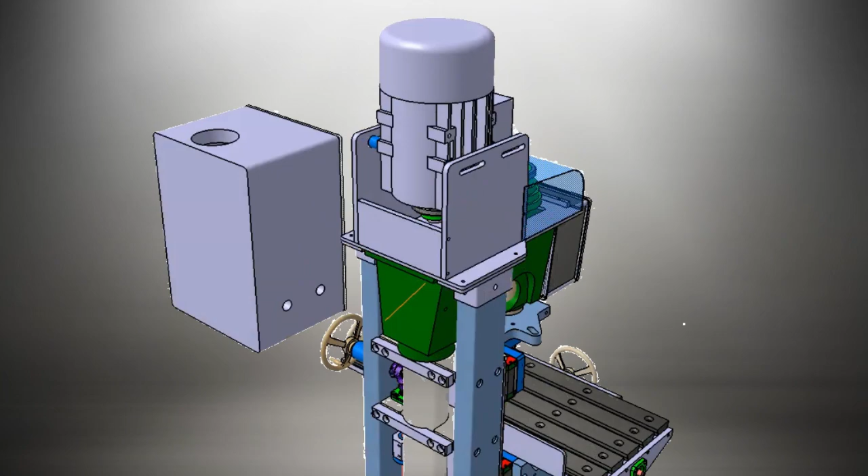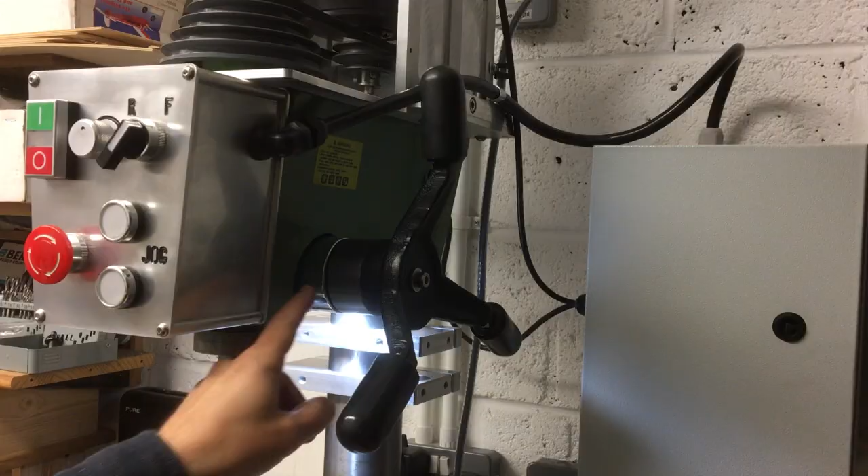While you've been away, I managed to spray this adapter collar that I made between the handle and the quill, just to move the handle away and give me clearance at the top there. It's this Rust-Oleum gunmetal grey, a slightly metallic finish. I used it on my CNC machine on some of the box sections, and I really like the colour and the finish that it gives, so I've done that. That should keep the rust at bay.

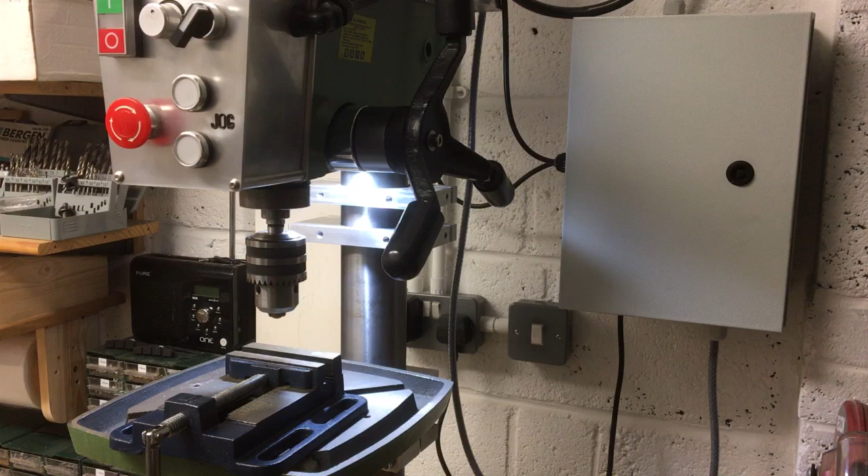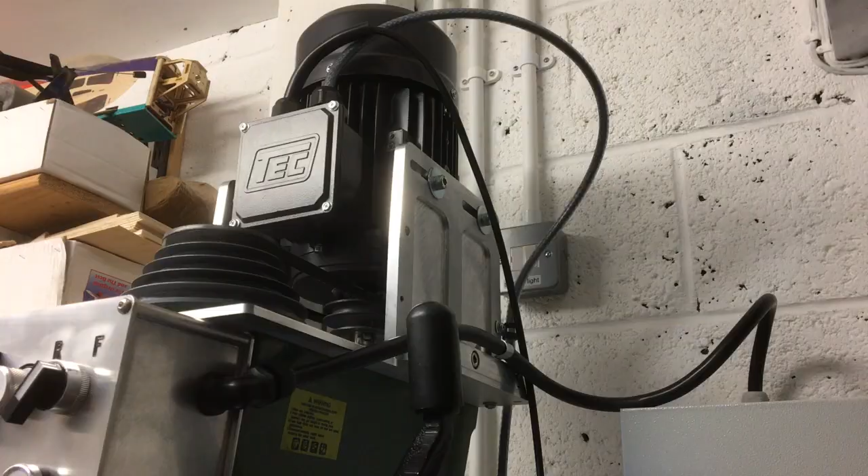In the last episode we also got the table mounted, which does mean we can start to drill some holes in some of the later components. The thing is, before we get too carried away with that, we need to have a look at the motor cooling. In an earlier episode you probably saw me install that 3-phase motor.

In the UK that would run at 50 Hz nominal, in other markets might be 60 Hz. On the end of the rotor shaft that goes all the way through the motor, at the top there's a fan. It's a white plastic fan, unidirectional fan, and that's enough to keep the motor cool at that nominal speed, 50 or 60 Hz.

One of the advantages of running it from the inverter with variable speed control is we can run it at a range of speeds. The downside is, because of that fixed fan, when we go to lower speeds, there's an exponential, or probably even a cubic, drop off of the airflow, and there isn't really enough airflow at the lower speeds, and you can burn these out. I know I've got the over temperature sensor in here, but I don't really want to risk it, and the supplier highly recommends you add an additional fan when running it below 50 Hz.

So before we make up the mounting for the auxiliary fan, we just need to see which way it wants to draw the air. You might be able to see that white fan down there. It's a straight bladed fan with a scoop at the bottom, basically a unidirectional fan, so whether it's going forward or reverse, it'll always pull the air in the same direction.

So we've just got a bit of tape here. We'll just see which way that is, and then we can mount our auxiliary fan to make sure it's helping and not hindering. We've got it in forward, so we'll run it forward and see which way it pulls the air. Starting now.

So the fan was going forwards, and it was clearly pulling the air down. Now I'll put it into reverse. Try it again. Now it's going the other way, and it's also pulling the air in. So whichever way it goes, it always draws air in and over the motor.

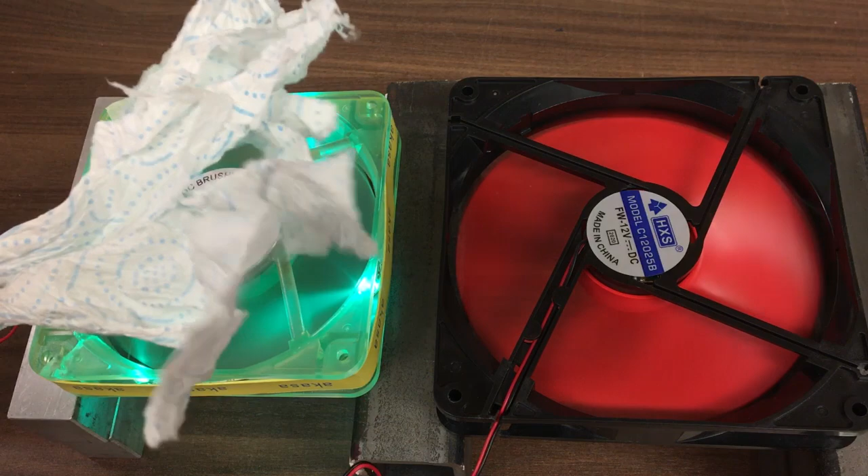Well, actually, as you can see, that's chopping it up. It's doing pretty well compared to - this is really scientific, I know. So we've got that versus... Yeah, so the smaller fan is actually kicking out a lot more air.

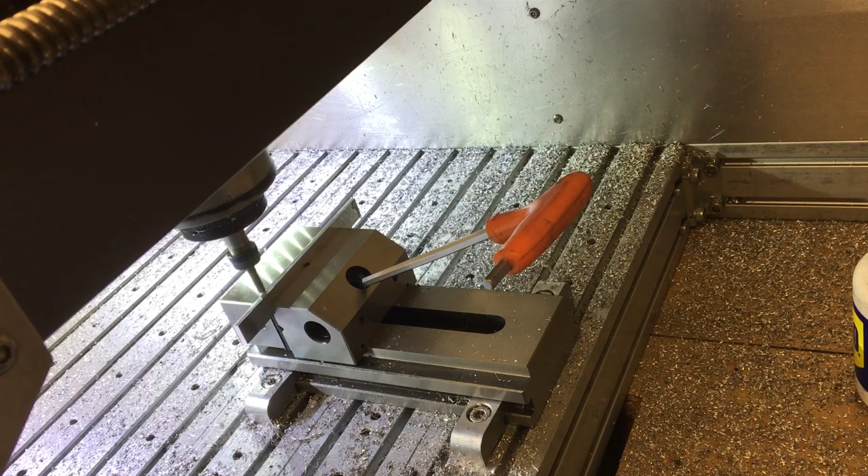I made up these two side brackets just out of a bit of 3mm scrap aluminium. So I'm using the CNC machine in manual mode just to get to the final dimensions.

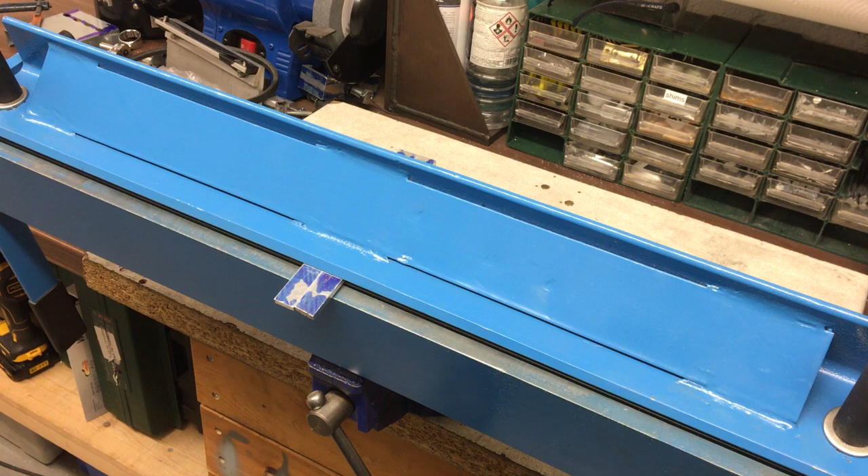So we've got the two pieces ready to bend. They're oversized at the moment, so you can see they're just rough cut. Then when it's bent, we can work out and measure the final length and then drill the hole in the right location. I'll just put a shim in the back just to protect it as we start, so it doesn't mark the work so much. Here we go.

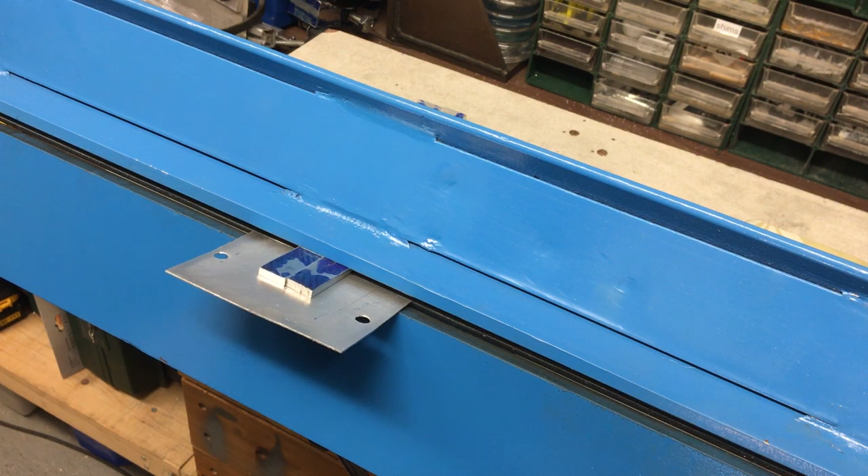And here I'm using the height gauge just to mark out the centres of the hole.

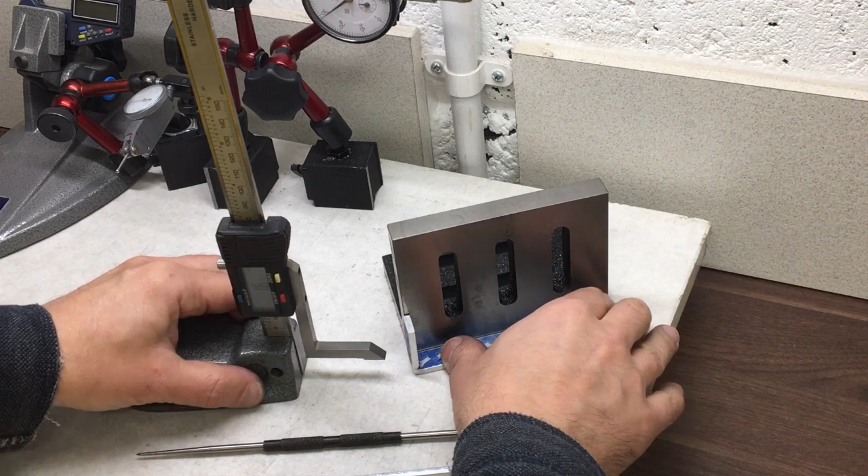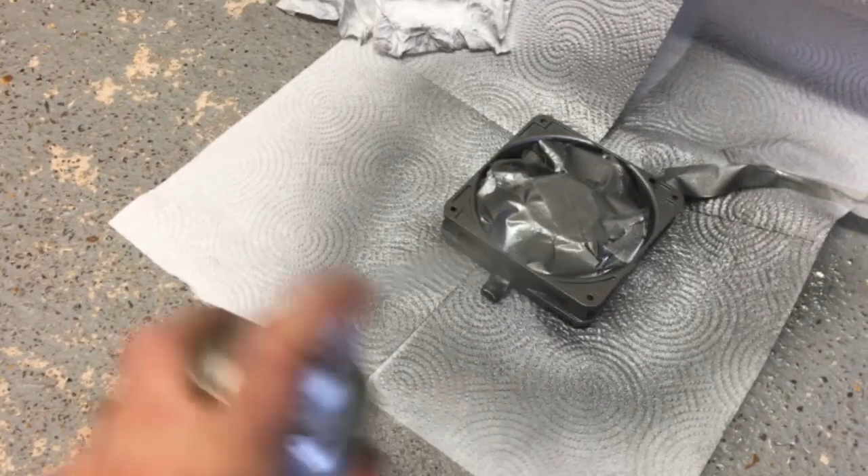Okay, so after a little bit of spray paint, that fan looks like this, so it's got a nice finish on there. And then I've also added this little 2-pin connector to the side to make it a little bit easier to fit. So that fan goes on there, kind of diagonally like that.

Like that, there. And then those two brackets I bent up look like this. They've been spray painted as well. So they're kind of going to hook in. I've got this little 4mm bolt in there, and they'll just locate like that. And then the other end just picks up on there, and they kind of sort of pull down. There's sort of two hooks like that, just hold that in place. I've also got a grill on order that I'll clip in when that arrives, and that should work really well.

Right, let's get it mounted.

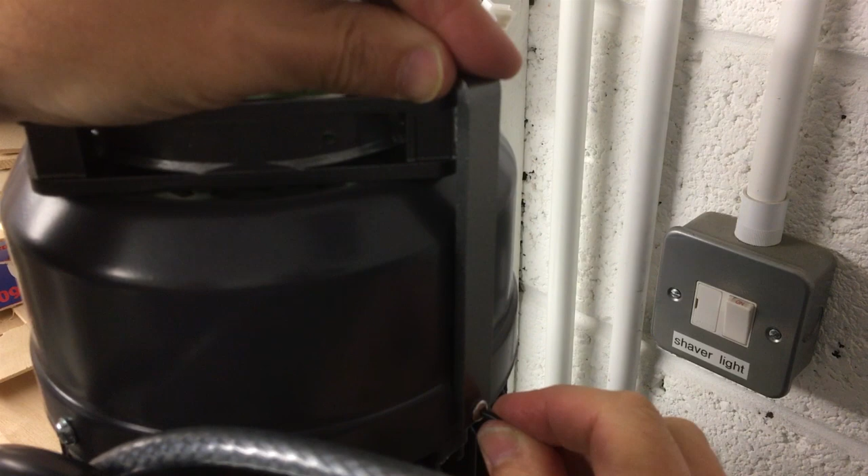Okay, one side, we'll do the other. And the last thing to do is just hook up this connector for the power.

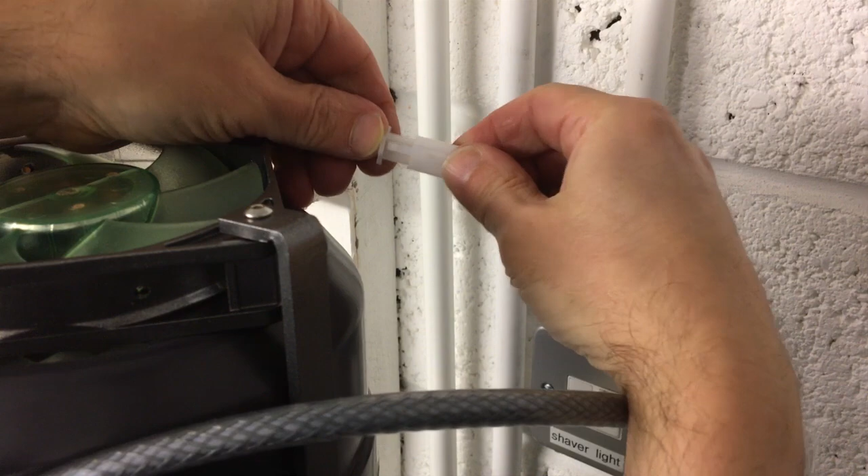So this is the cable that we just connected up to the fan up there. All I need to do is clip it into this little bracket that I made up, and then that'll be the wiring done.

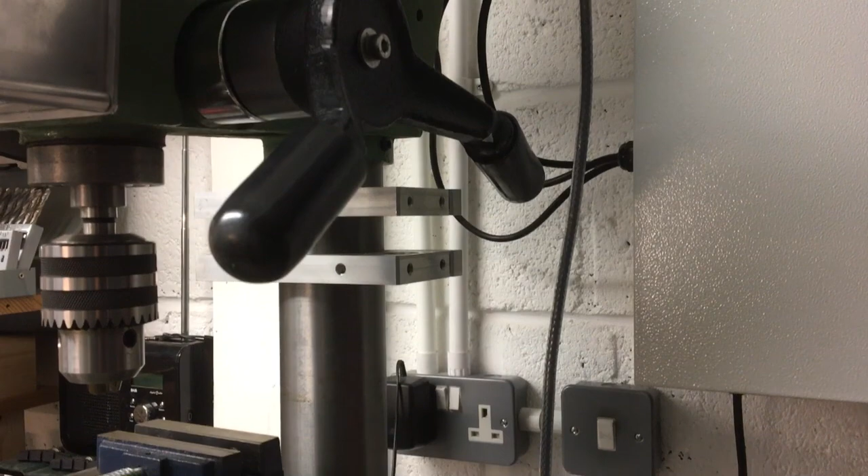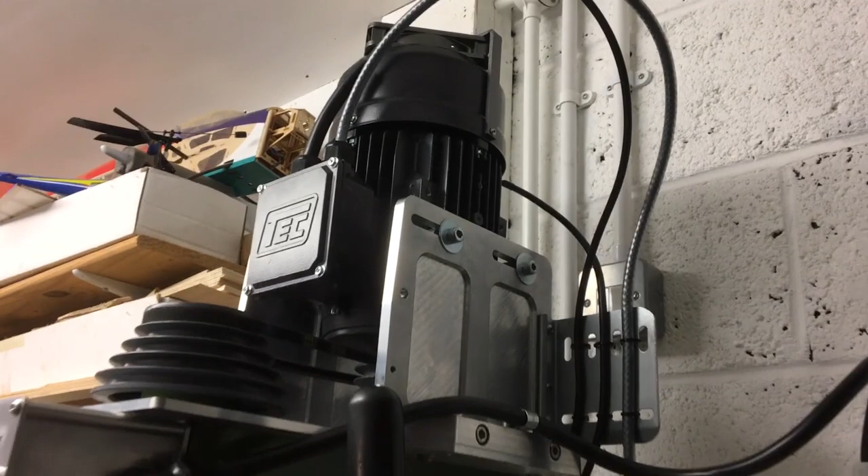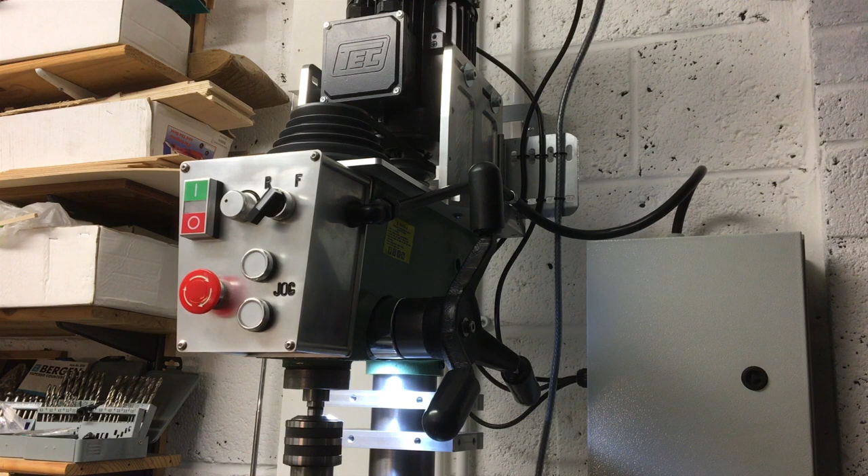Alright, let's switch it on and see if it works. I think I can hear the fan running, it's pretty quiet. Brilliant, another job done.

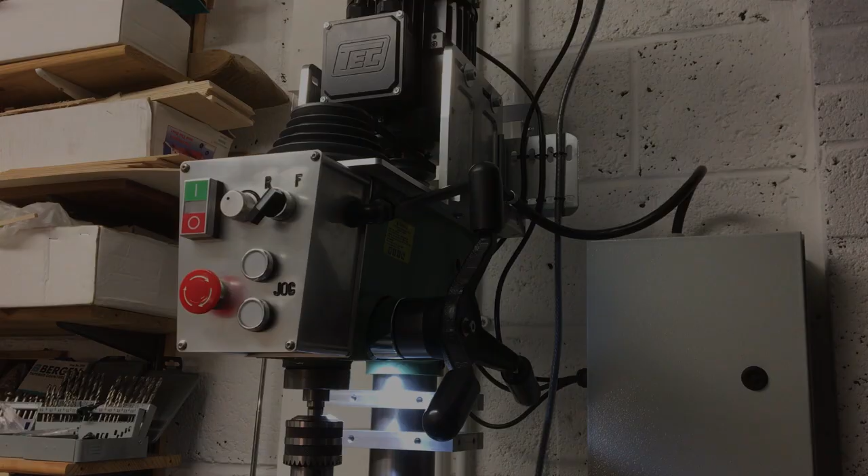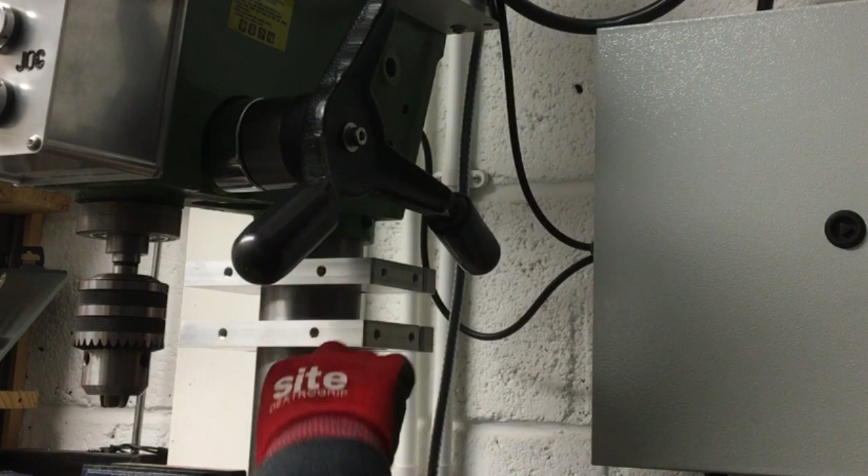Okay, let's have a look at the box sections that run down either side of the machine here. So they perform a number of functions. One is they provide some stiffness between here and the main column to stiffen the head. But also, because they run all the way top to bottom, they also stiffen the column itself. And thirdly, they provide a surface at the front here that we put the main plate on, and then the rails mount to that. So three functions in one.

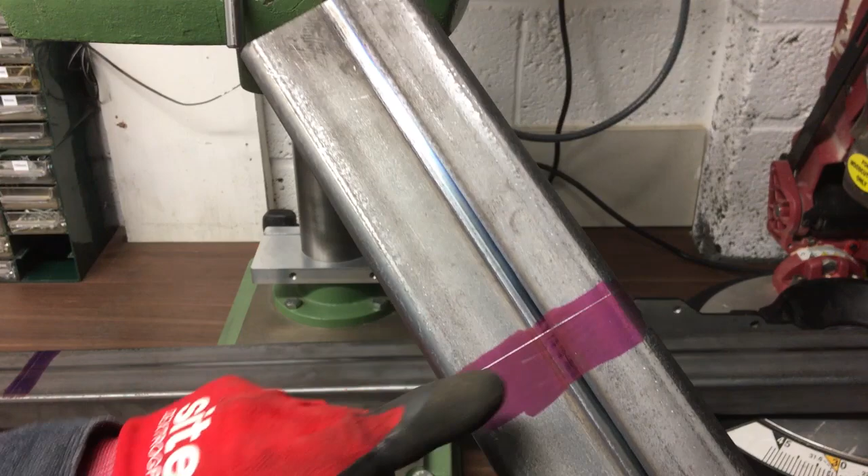So I've just measured up the actual gap here rather than relying on CAD, just the actual gap we got. I've got the box sections down here, and I've already cut the ends of them square on the chop saw, and then I've just marked up the complete length there, so we need to chop this end off, and then we'll make sure they fit in there, and then we can go over to the CNC machine and start spot marking out some of the features on here, and then we can finish off on the drill press with some of the bigger holes. Right, so let's get these chopped to length.

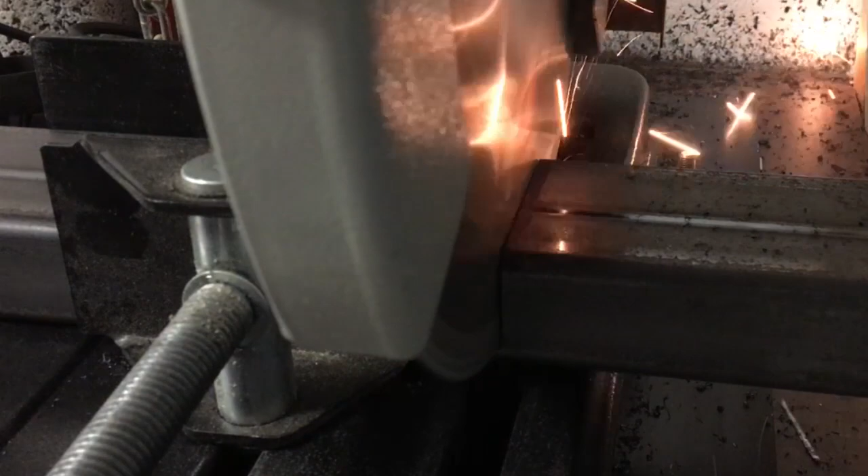Right, so we'll just offer it up into position and make sure it's going to fit. So it'll sit a few millimetres off the base there, just to give me some clearance.

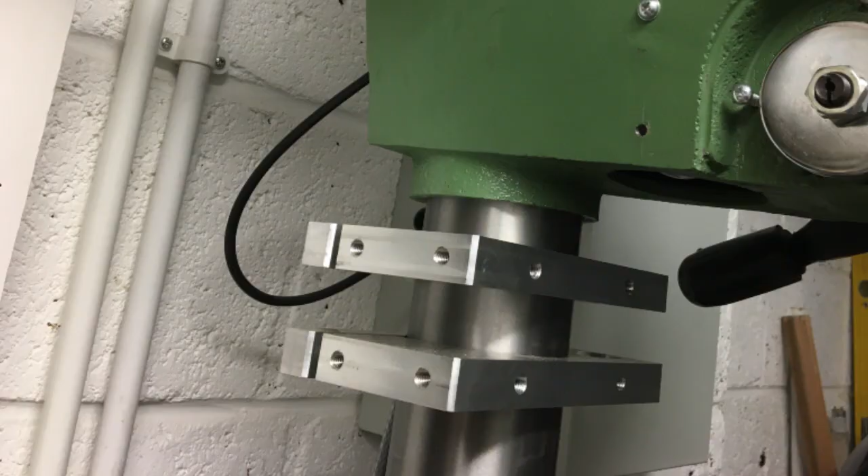And then there'll be two fixings that go into the side of this plate through here, and they'll pick up on that face there. And they'll bolt in the same way, so there'll be a clearance hole through here, and it'll pick up on that back face, just go into the two M8 holes we got in there, onto this piece, and they'll be flush with this face as well.

And then at the top here there's a kind of bracket arrangement that'll be welded on here with some slots in it just to pick up some threaded holes on here, so that will join this bit to the top plate, tying the whole machine together. So we'll tie the head to the column, and then also on this front face here, this is where this 6mm front plate will go on for the rails, and then there'll be another one on the other side obviously.

Yeah, so it looks okay. I just left myself a tiny gap there just in case. Yeah, I didn't want it to be a snug fit, so that's fine. So it's going to work nicely.

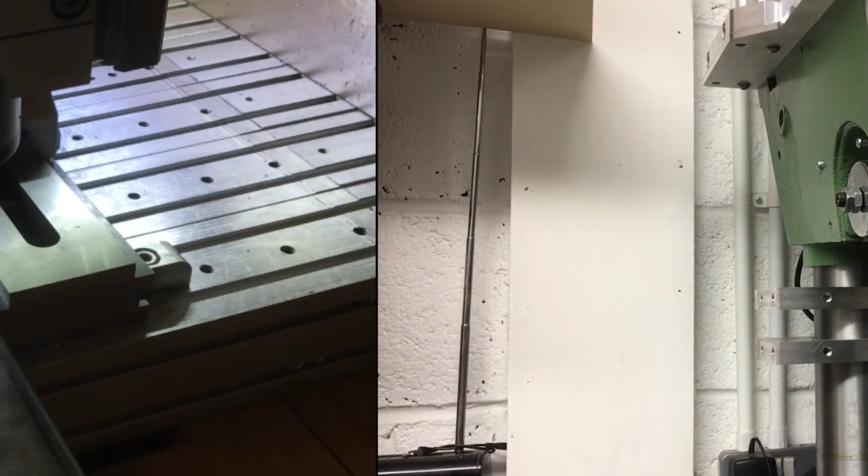So I've got the section clamped down into the CNC machine, and then I'm just using the spot drill just to mark out all the centres of the holes.

So this is the cutout that allows the height adjust for the table to go in. There'll be a sub-assembly mechanism that goes in there that will contain the drive unit and the two gears that link it to the ball screw.

And then finally the finish pass on the cutout.

And that's got us to this stage where we've got the holes spotted and marked out on both sides, and then we've got this hole cut out here for the height adjustment mechanism to go into.

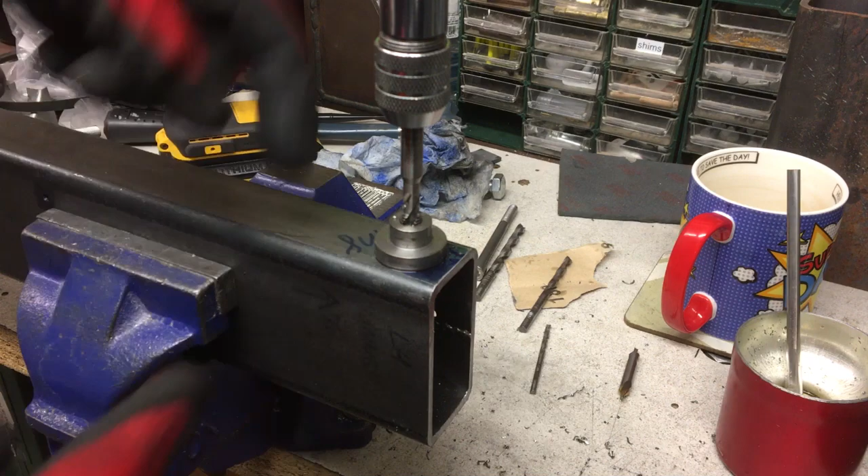So this is the top of the box section. I'm just drilling and tapping out to M8, and that's where this kind of bracket assembly will go that will hold it onto the main head that will be about here.

Just using this little guide to keep it square to the work.

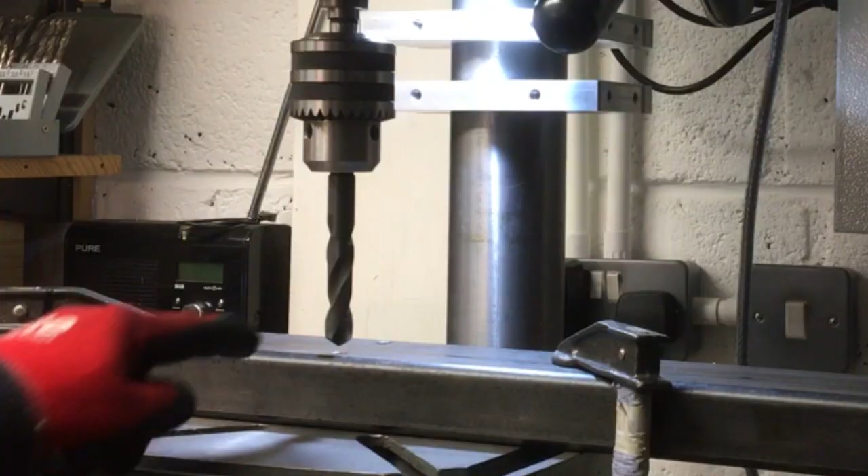I've drilled and tapped most of the holes now. It's just the really large ones to do. This is a 15mm drill bit, and that's just to give clearance for this socket head to go through. So that will go through there and then sit on that back face where there's an 8mm hole, and that's to bolt it into the sides.

So we'll get some go fast juice on that and dial the speed in. And let's see if we can drill a hole. Okay, here we go.

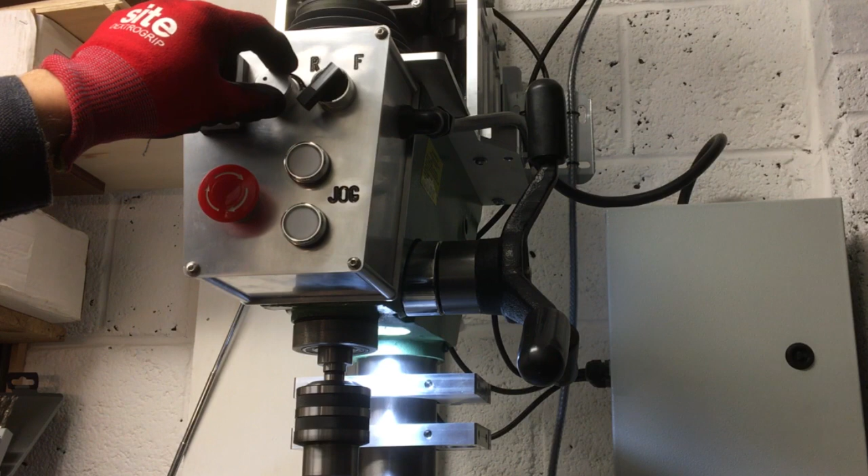Okay, let's see how we do. Too fast.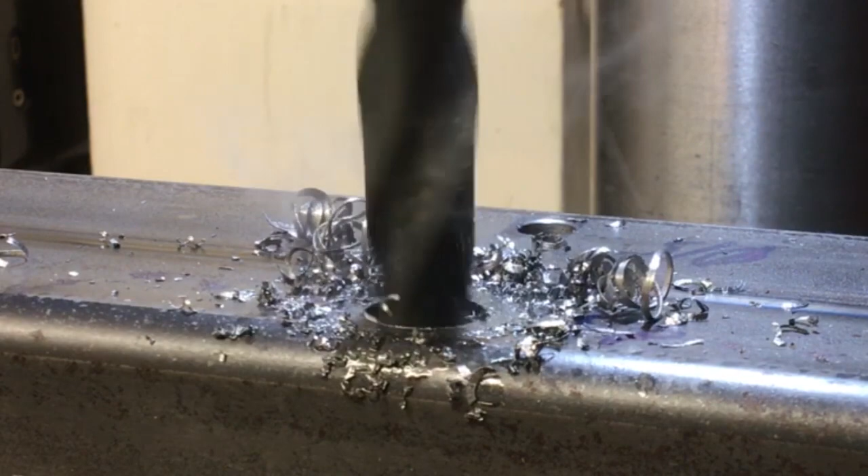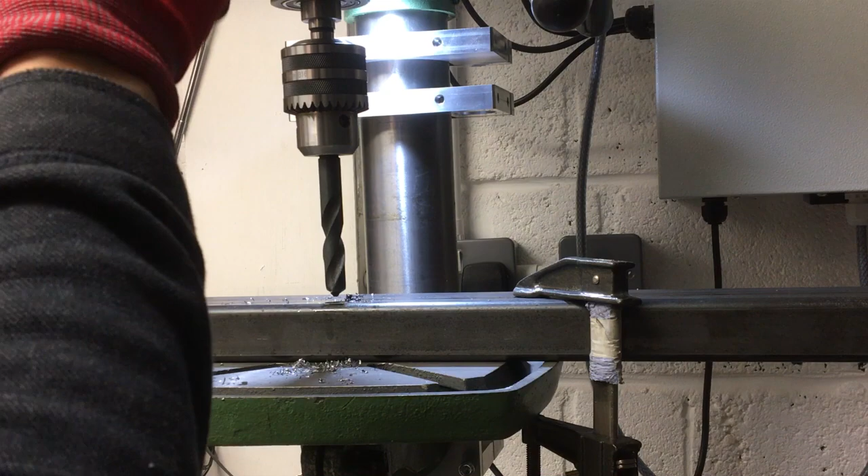Well, I'll call that a success. That's really good, it was quite nice dialing the speed in. You could sort of dial it in by ear and just feel when it was just right. Really nice not having to change belts. Right, onwards - just got the rest to do now.

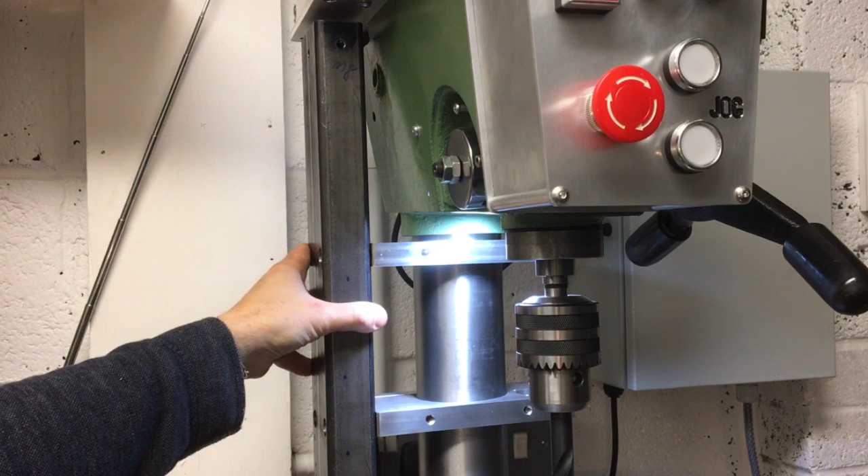Okay, these will be painted, but I just thought I'd better check it fits first. So I've just got the first few threads started on the first bolts, and we'll just put the next set in. I just got to be careful I don't drop it down inside. I think I can just about get it out the bottom of the section, but let's not try it unless we really have to. Right, so let's get this one in.

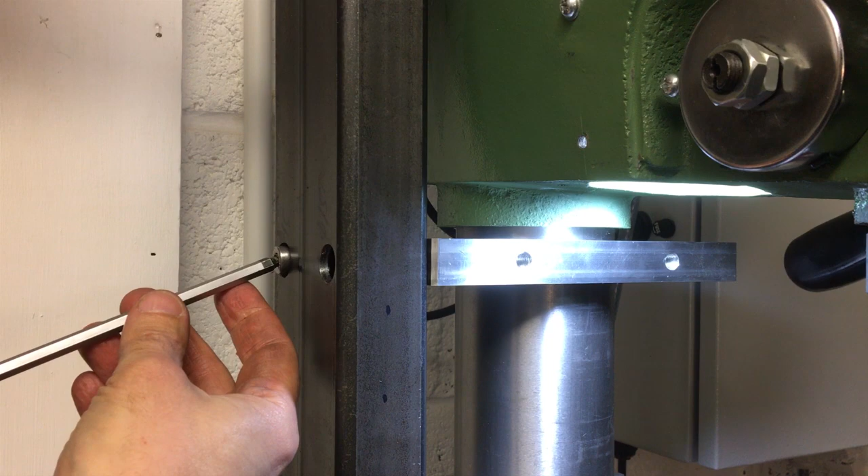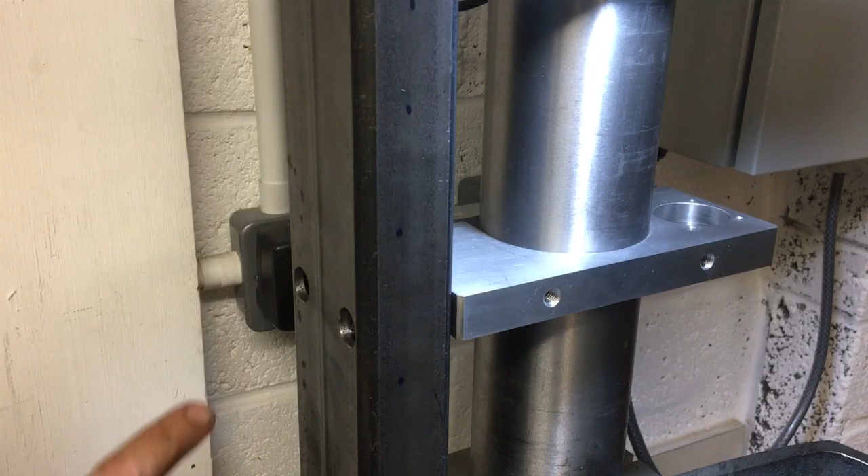Just get a couple of threads on it so we've got a bit of free play still. There we go. Right, the next one at the back there. Okay, tighten these up now. I haven't got those flush there, we just loosely assemble it. Let's see what we've got.

Okay, so that's one side in. It went in okay. Okay, and there's the other side. So it's almost the same, except it's got a few extra features in there.

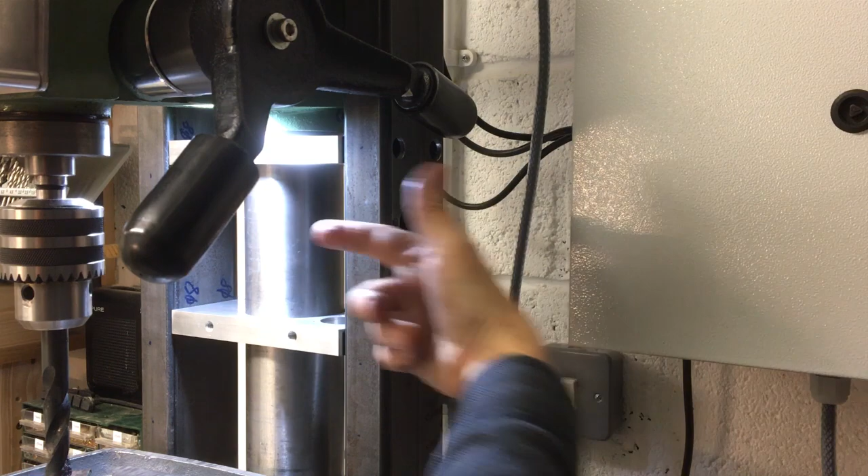So here's that slot close up. This is where the crank assembly will go into here. So you'll turn this handle, and through two bevel gears that will drive the ball screw, which is here, into this part here, and then there's a nut on that goes up and down. That moves the whole table up and down.

So yeah, looking pretty good. And then you can see there'll be a front plate that goes on here, the 6mm plate. I haven't drilled the holes for the rails because that will be determined by the other plate first, and then we'll put the rails on and drill them right through into here. And then you can see some tapped holes in here - there's M8 tapped holes. They also hold the plate on there, so it's going to be a pretty stiff machine once we're all done.

And then at the top here you can see there's 3 M8 holes that go all the way around, so there'll be kind of brackets sort of this shape that go onto there, and that bracket will be welded onto a plate that's virtually that shape, steel plate, and that will be bolted onto there. And then there'll be some pretty large generous clearance holes in that, and then that will allow me to bolt this bracket, which is bolted to this, to here, basically make that connection. Same on the other side as well.

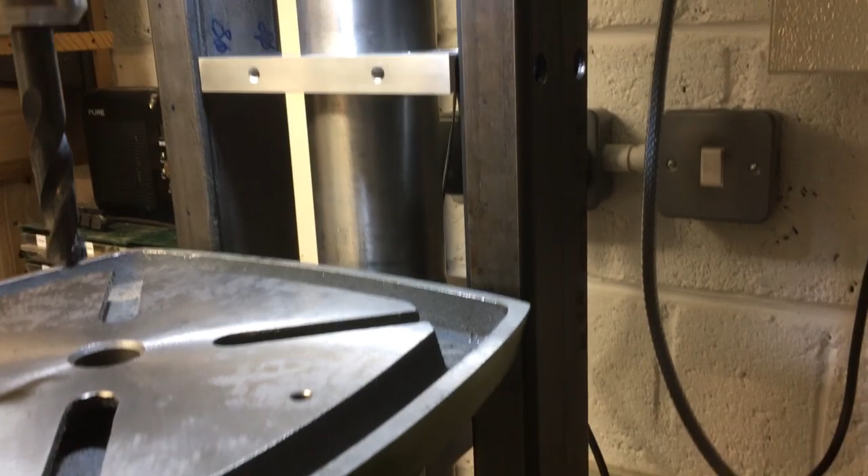Looking good so far, very pleased with it. So the last thing to do then is to make this connection up here. So there'll be 2 pieces. One's a 6mm plate that goes in here and goes around that profile there, and it's held in place with these 4 fixings that go all the way through. So that's our 6mm steel plate.

And then there'll be a C-section that I'll make up from another larger box section, I'll show you that in a moment. And that will go around here, the 3 sides, have holes in it to take these M8 bolts on 3 sides. And then that piece of section that's around there will be welded sort of here, here and here onto this upper plate, and that's what will finally make the connection.

So I've got those pieces of material, the drawings over on the bench. Let's just go over there and have a look. And to make those brackets, we've got this material here, so there'll be 2 pieces cut out of this. This will be the flat piece that goes onto the sort of head plate at the top, and then this is a bit of box section that got left over from my CNC machine - this is the material I use for the large X-axis. I think it's 6mm wall or something like that, it's a pretty heavy gauge. And so what we'll do, we'll use that and chop it down to make these kind of C brackets.

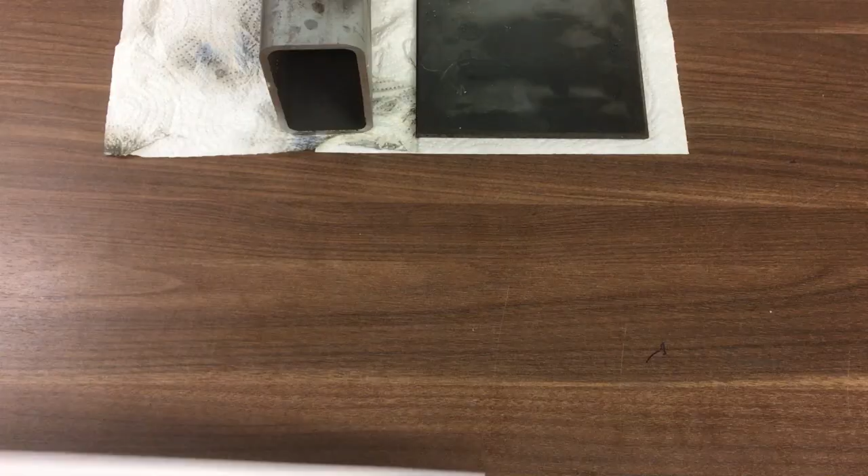So here are the drawings. So this is the drawing for the flat piece. So there'll be 2 of these cut out of that plate there, 6mm plate.

So there's nothing too fancy around the edge, just the profile and some holes for the bolts to pass through. The main thing that's quite interesting here is I put this pocket on here.

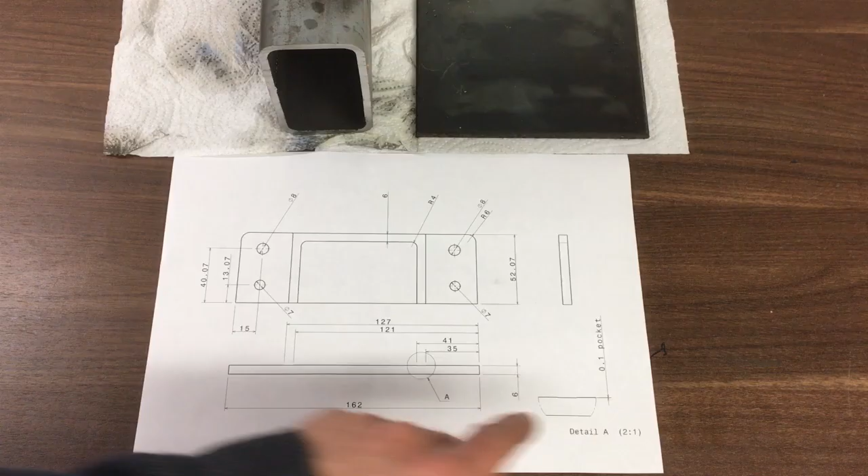It's only 0.1mm deep, and that forms a bit of a guide, because what I've got to do is take this section that's too big at the moment and chop it down, since it's too long and too deep this way. So I'll have 2 L shapes out of this, then weld them back together, using this as a guide not only to make the correct shape but also get it in the right position so it can get welded onto this plate. So kind of a C shape will stick up like that. That's the flat pieces.

And then for the 2 sort of C shapes that I've got to cut out of here, that's the drawing there. Again, nothing too fancy, so it's a C shape there, sort of that shape. But I've got to then crop this down because it's too long. And then there's just 2 holes - actually, there's 3 holes in it. There's one here, here, and one on the rear face.

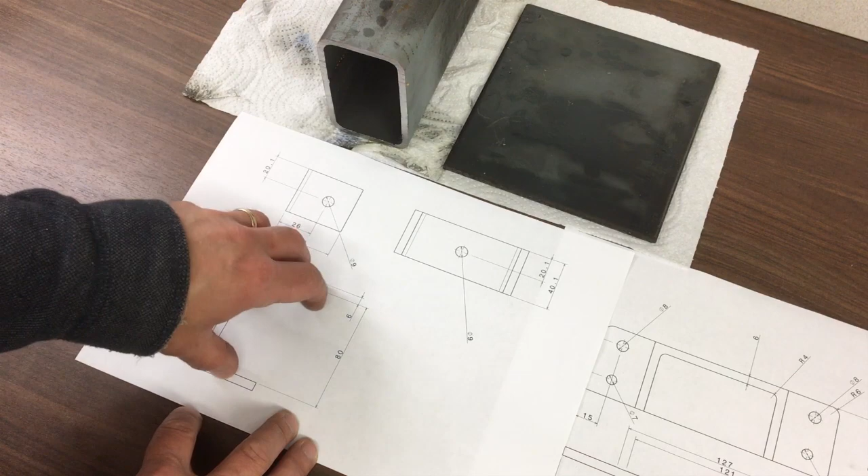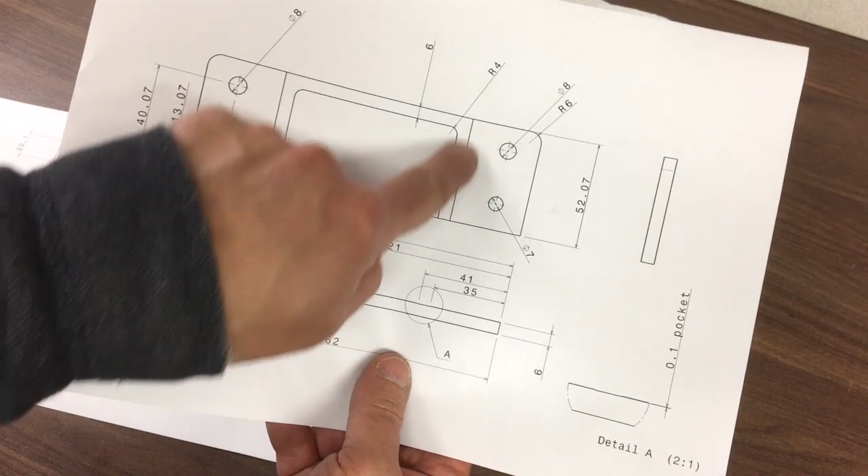This forms a bit of a tube or a node that the section coming up down the side of the drill press goes into. What you might notice as well is, instead of being just a notional 40mm, these are 40.1, and the hole is at 20.1. That means this is 0.1 longer than it needs to be, and that 0.1 is the bit that will sit into this 0.1mm depth pocket, so you'll basically get 40 depth from here. That's just how it's going to go together - a self-jigging feature here, and then that's what we need for the C-shaped part.

We'll start with the plates.

I've got the part clamped down now onto this spoil board, and then the spoil board is clamped down to the bed, and I've got 3 of these blocking pieces in just to try and stop it moving around. The idea is we'll bore out the holes in this side and the other side, screw those down to the spoil board, and then we can take some of the clamps off and put those just around the edge and finish off the rest of the features.

I started by boring out the holes, which I could then use to screw the part down. I had to be careful that the part didn't move, so I ended up machining these holes on the slow side really - could do with machining faster, but I wanted to make sure the part didn't move because it was only held on by those 2 clamps.

Once I'd machined those holes, I could then screw the part down to the spoil board nice and securely, and then go a little bit quicker on some of the other parts.

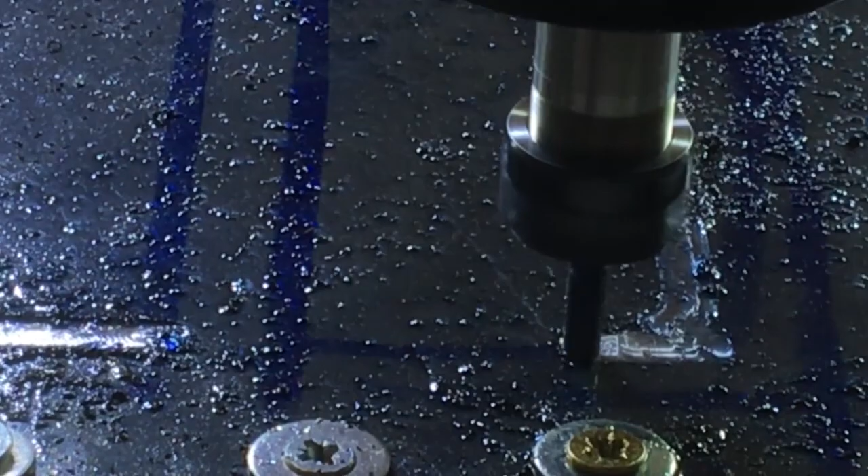So here we're doing an adaptive just to machine out the recess. This is the second time I've used the Fusion 360 CAM since Autodesk changed what they give away with the free version. I did notice in the middle where it would have normally done a rapid, that went at the standard feed rate, so very slightly slow. But overall, not a big hit for me being a DIY user, but I guess it could annoy some people.

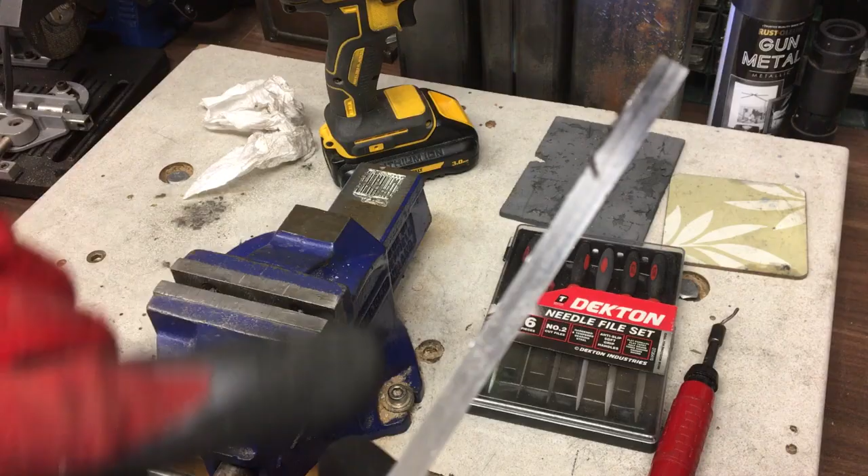They are fresh off the mill, so it's not too bad a finish. You can see there's a little bit of recutting chips there. I don't have any air blast or anything like that, but pretty pleased, pretty accurate. So we've just got to clean up these edges, deburr the holes, and then these parts are done.

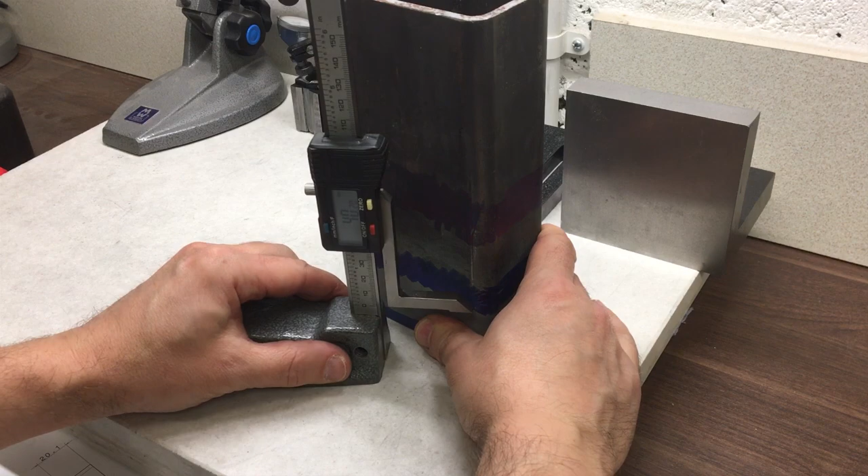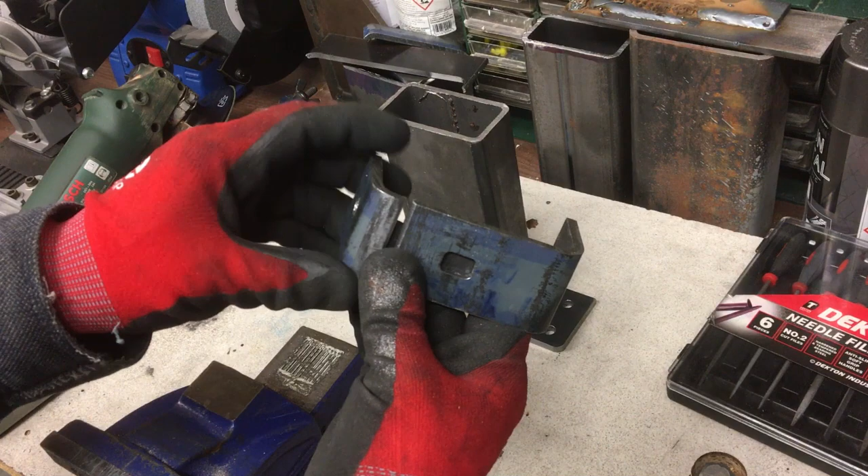Okay, we're finally there. That took a bit longer than I was expecting, but we got there now. So we cropped the ends off here, took a little bit out there. That's ready to weld that back up again.

So what we've got here is a bit of box section that's the same as the piece on the drill press. I've just lined that up on the plate there, and then this will go on here - yeah, that's nicely centralized. So we've just got to weld that back together and dress that up, and then we'll weld these on here. And then that's the lower bracket made.

So we've got two of those - we've got that one, and one for the other side, of course. Will basically go on like that. There's another one of these made for that.

Right, let's set this up in the vise. Now I know that's going to fit. I think we'll just use this actually as a template, and we'll butt weld that seam together.

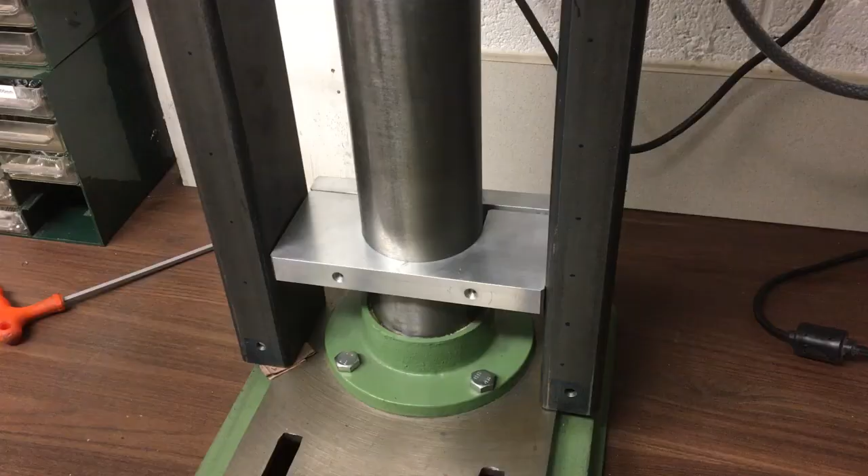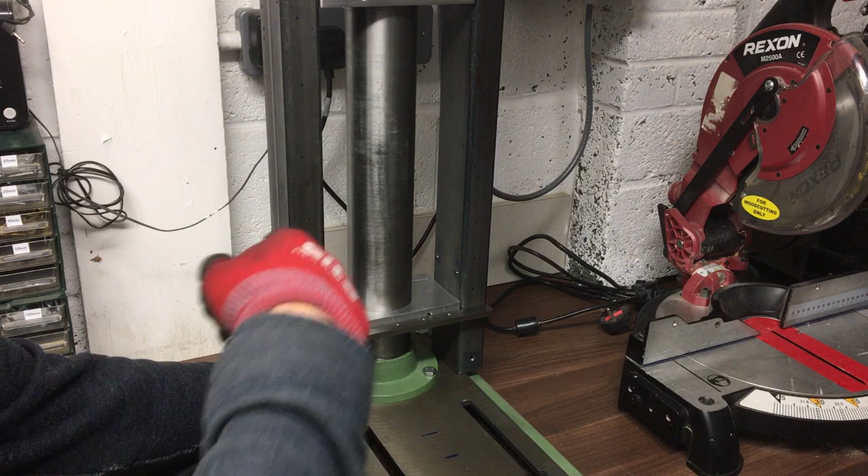Right, let's give you a quick update of where we're at now. I've taken a little bit of time just trying to square these up and get these level with this surface, because there's going to be a big plate that goes on the front here. One of the problems is that this box section is not particularly flat. It's got a bit of a concave section, it's not exactly 90 degrees, and the column is probably not completely true. So I've just got it as close as I can. If I really want to, when I put the final plate on, I'll have to shim the last bit. So I've got that in the 3 places, the centre one and the top one there. They're pretty close. I'm not going to get any better than that because these are just not perfect.

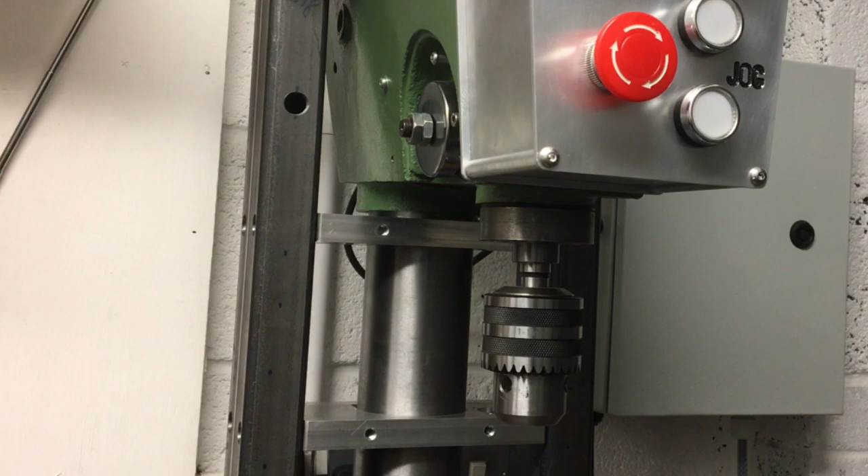I could have machined them, I guess, but I think we'll just shim the plate to get that to fit. Alright, now what we need to do, so I've got those pretty close, you can see that there. So what I decided to do, rather than my other plan, which was to use that little pocket machined out there to get those square, I realised I need to do it slightly differently. I needed to get all this square and true, and then measure from here to the centre of that and here to the centre of that to get this plane reasonably central. It's not critical because the table will just move 90 degrees to this anyway, but I needed to get that dialed in, and then I can put these brackets on. I've just put the chamfers on there ready to be welded on, so they'll go on there. So once this is all squared up, I can get these screwed in and then just tack that on there, take it off, and then finish the welding, and then that'll be complete.

So we just need to get this square to this. Now I've got this level, just need to rotate it this way and get it square to the centre of the chuck.

Okay, I've just put a little twist drill in there, so we'll just measure. We can measure from anywhere really, but probably on the corner of this aluminium block's probably more accurate. So take that. That is 192. And the other side, that is 190. So we just need to pull it ever so slightly this way.

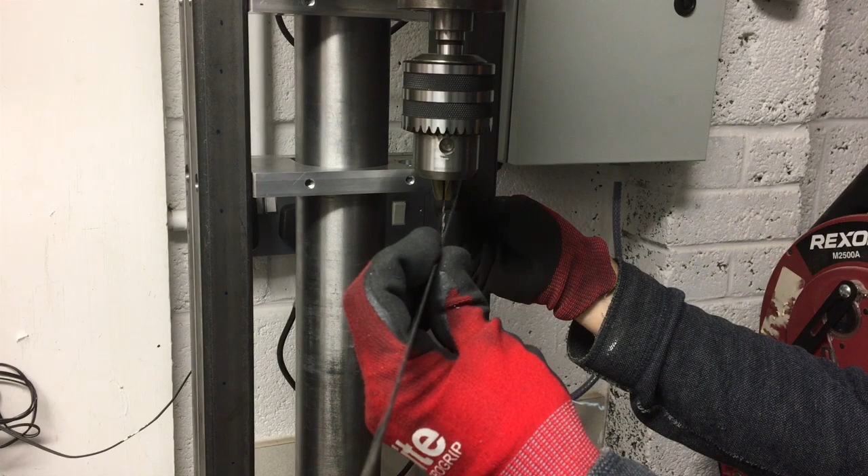192. I've gone the wrong way. Back in a minute. Okay, I went the right way this time. So we are now 190 exactly. On the other side, 190. I'd say within half, maybe a quarter of a millimetre.

So absolutely fine. It's not super critical because obviously the table will move. What's really important is that the table moves 90 degrees, so both these axes are 90 degrees. But just in case you want to square off a fence or something like that, it'd be nice just to have that as accurate as we can make it anyway. So I'm pretty happy with that. Now we can weld the brackets in place at the top, and we've got our position established.

So we've got it pretty close up against there. It doesn't need to touch because that's what this bracket's for. That will make up the last bit there. So we'll get that in there. I've only got this one left, but we'll replace these with these mushroom head ones, which look a little bit nicer, but for now this is fine. Let's get that in. And there's one of these on the back as well, but for the purposes of just tacking it in place, we don't need that, so it'll be easy to do that when I take this all off and weld the back and weld this permanently. Right, so the other side.

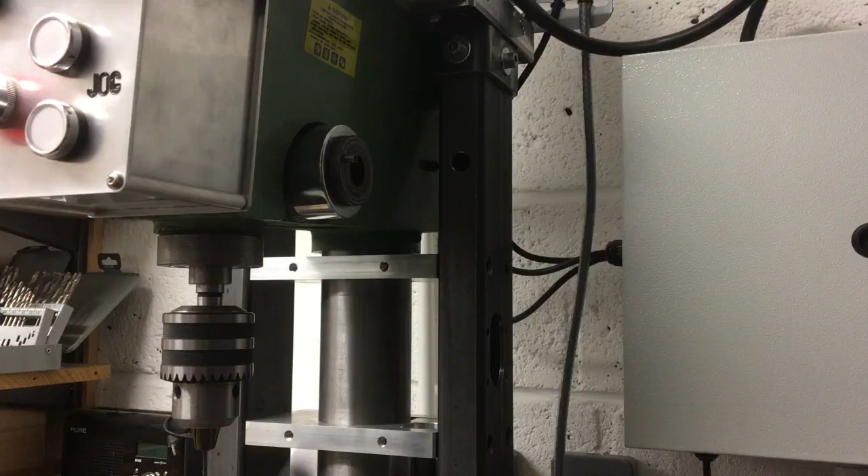That's good enough. So you'll notice on this side there's a gap between that plate that's flush with the top and this bracket. Let's measure it. Don't know if it's 1-2 millimeters, it's not much. Yeah, about 2 mil. As you can see, it's flush on the other side, so there's a 2 mil step in there. Now what you'll also notice, we measure from the casting to there, which is how I set the position. That's 58, and you have to take my word for it, but on the other side this also hangs out 58. So the only way that can come up there and miss that by 2 mil is basically because the column itself can't be quite in the center of the casting, so this draft angle here and where that edge finishes, if you imagine that taper, the hole for the column is not precisely centered, it's off to one side. Which means when the whole thing comes together, because all the parts I made are absolutely perfectly made, we just get that slight difference there. Won't matter about the functionality, but it just bothers me.

Anyway, onwards, let's get that tacked up. And here they are now, fully welded into place. So I'll just grind that back to make it look a bit nicer. So that's the first one, and there's the second one there. Right, let's get those fitted, and then that's another job done.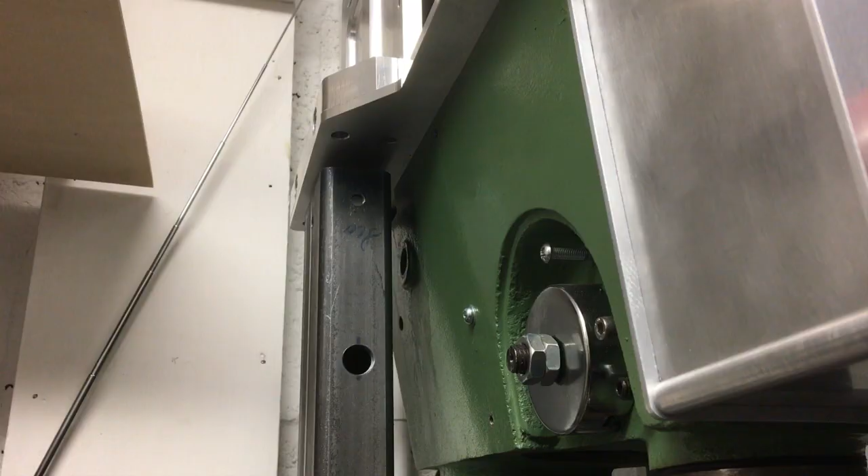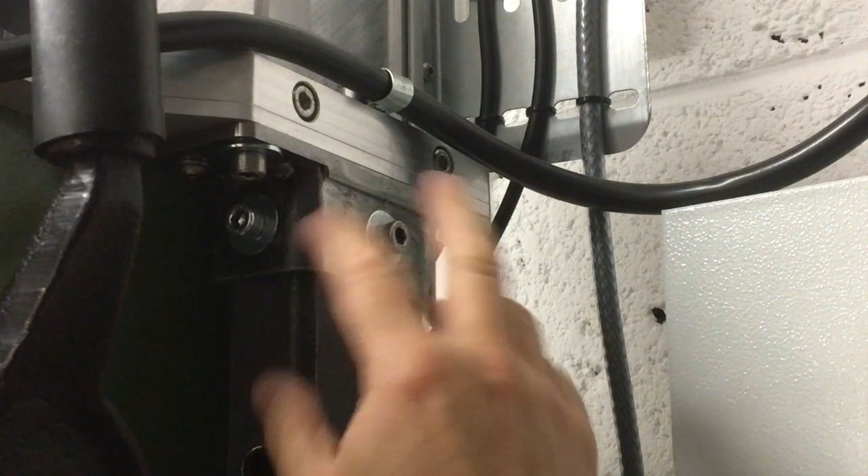Okay, just do these up loosely and then pull it up against there. Go somewhere about there. There it is, it's looking okay. So as I said earlier, I've got some of these button head screws on order, M8 button heads that look a little bit nicer, so they'll go in here, one at the back and 2 on there. But for now it's obviously going to fit. So I've got the same on the other side, same round here. See, that was my last button head one there, so they'll all look like that eventually. So 3 in here and then 2 on there.

Yeah, it's looking good. Okay, I'm going to wrap up the video there. Didn't quite make as much progress as I planned, but it is progress at least. So we've got those brackets sorted out there, and we've got all these box sections down here drilled, and they're all nicely dialed in now. So I think that's going to work.

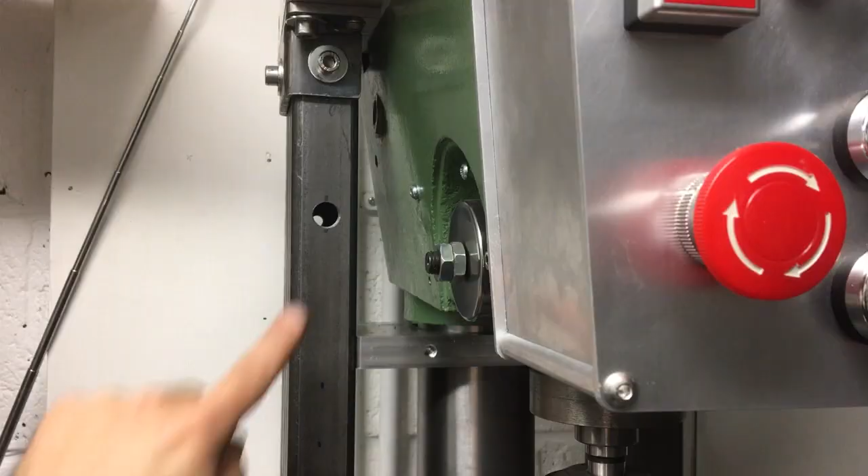A couple of other things in there that you may have noticed. So there's a hole here, you can see it goes all the way through, and the idea of that is there's going to be some standoff brackets, some big chunky tubes that come off and hold both these posts onto the wall, just to stop it shaking around. It always shook around before, but now it's got a little bit more weight on it, so I want to tie that nice and securely to the wall, so it'll be fixed at the bottom, and then one this side and one the other. And then down the bottom here I've drilled and tapped these. These will be some end stop pieces that go on so the whole knee doesn't shoot off the bottom of the rail, so there'll be a stop there and a stop there.

So the next jobs are just to take these off, clean them and spray them. They'll probably be sprayed up by the time you see the next video. And then I think we'll start working on the front plate that goes on here that holds the rails, getting that dialed in, then we'll see where that takes us. We've still got the cover to make at the top, and then maybe I'll redo these pulleys—not immediately, probably at some point in the future, because they have got a bit of run out and it does make the machine shake. I know it will be screwed to the wall, but it'd be better if it's running a bit smoother to start with.